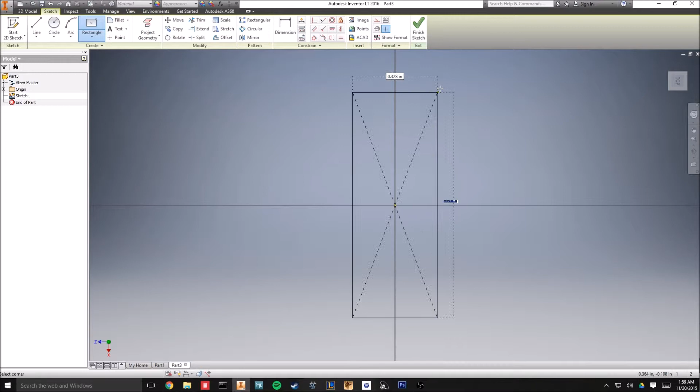Open up a new part file. Now, these are not any real dimensions in regards to soft jaws. These are just going to be a sample drawing of what you might be able to utilize.

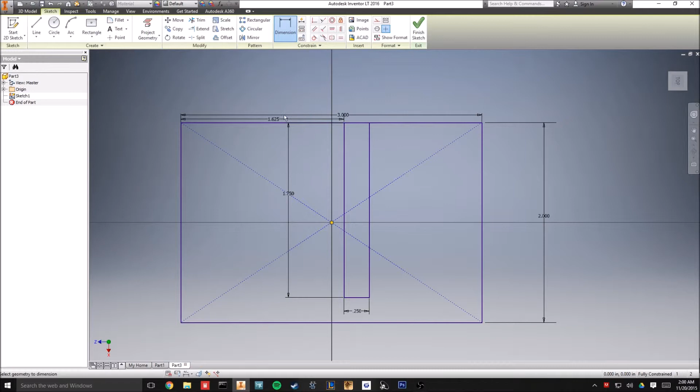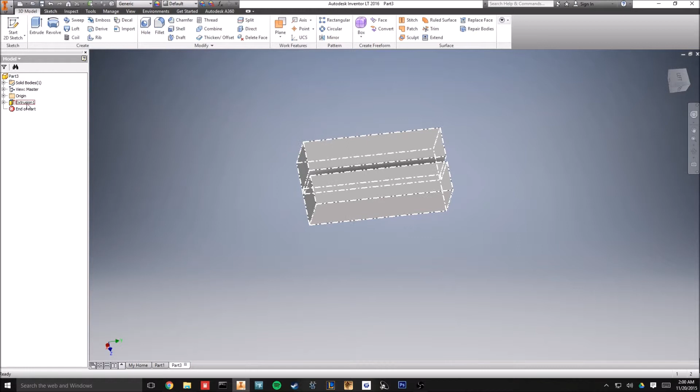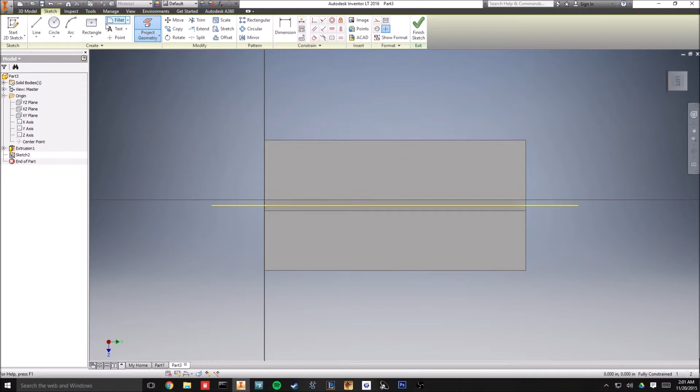Alright, now we have a set of soft jaws that are perfectly centered. Hold up here. Let me edit that feature. Usually have that as a preset. But these are now perfectly centered on the XYZ center point. So we'll create a sketch, and I'm going to utilize some geometry projections to get myself the point that I would like to be.

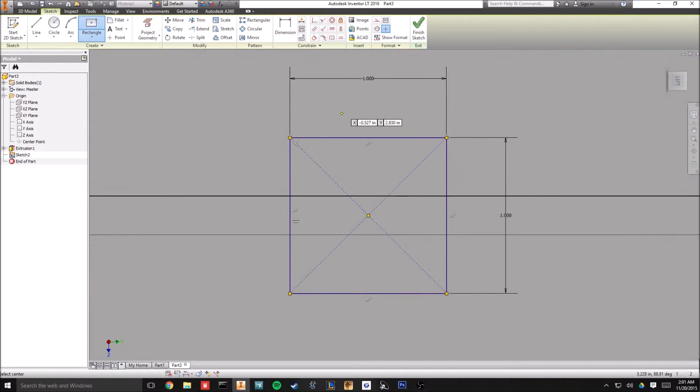Well, it's not finding my center point here, so let me go ahead and remove that, and we'll go ahead and project the center point instead. 1 by 1. So we're machining a 1 by 1 part here, and we'll go ahead and extrude this into the part.

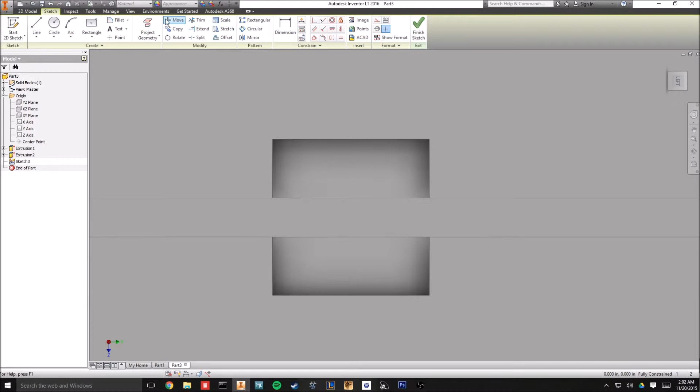So now, in this situation where we'd want to deal with the Mickey Mouse ears, the way that I'm going to do this is already going to avoid the issues with mirroring the feature. I prefer to create them as a single sketch and extrude all of those pieces of the feature inside of that sketch. Some people prefer to mirror it across the line. That's just fine. But as I go in here, my solution to accurately creating Mickey Mouse ears consistently is to

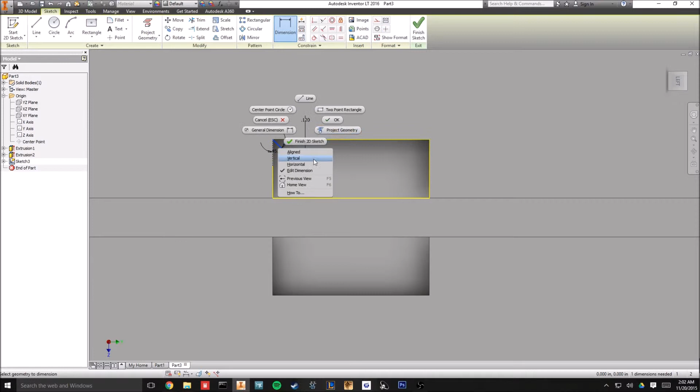create a line, and it comes off the corner. I'm going to hit tab here directly and create a 45-degree line. Now, whatever length I make this, I'm going to want it to be 1/2 of my cutter length, and if it's a 1/8 cutter, then giving it some slop there. And I can now create some Mickey Mouse ears that are a little bit larger, but it's perfectly centered. I don't have to worry about arranging any lines over here or over here.

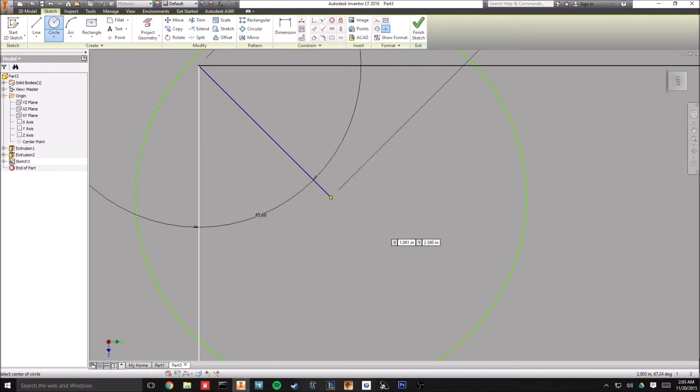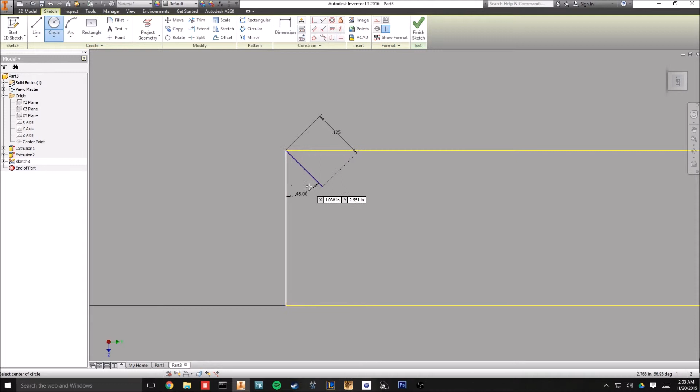Say you don't have the pop-up to immediately create that 45-degree angle. A simple way to do it inside of Inventor would be to draw your line, and then into the dimension, add the 45 degrees here. And now we're free again to create whatever cutter size we want. And every single time you're going to have Mickey Mouse ears placed exactly where you want them.

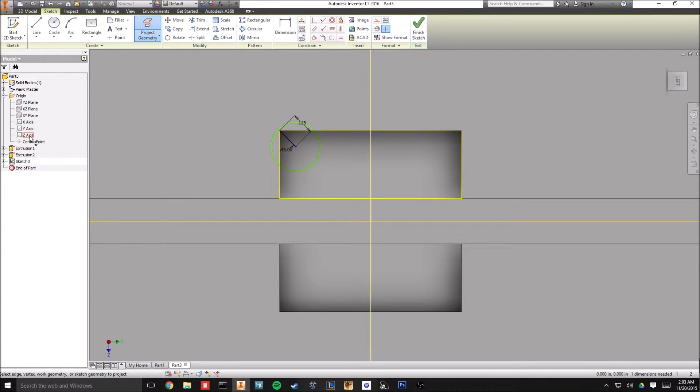Now the way that I'm going to go about creating these Mickey Mouse ears is I'm actually going to utilize the X, Y, and Z axes. And the reason I'm going to do that is because I create all of my parts on center with X, Y, Z axes. I'm able to use them as mirror lines for symmetrical objects. That I find to be a simpler, more neat way to be doing this work.

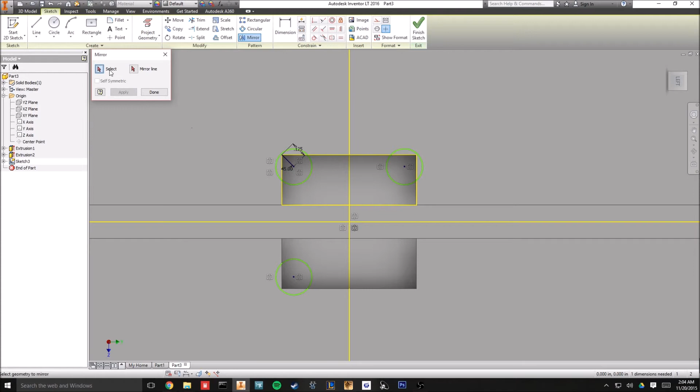So I'll go ahead and before extruding this part, I could either do this afterwards, but in this case, because we're dealing with a square symmetrical part, I'm going to be doing it all inside of the one sketch, so I only have one extrusion to worry about. So I'll now go ahead and mirror the object, apply, apply, apply, and I'll finish this sketch. I'll extrude these. And we have the completed Mickey Mouse ears.

And this is the part that we viewed earlier. So that's the way that I would go about drafting this.

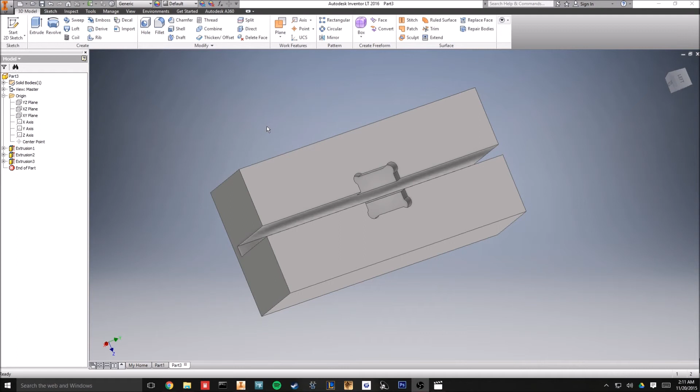One quick note that I realized I had forgotten to add to this was that if you wanted this to be two separate bodies now, I'd recommend doing it at the end. This would be reworking your workflow a little bit, but go ahead, create the sketch now. I'll project this geometry, finish the sketch, extrude it negatively all the way through the part, and we now have two separate bodies, but they are completed.

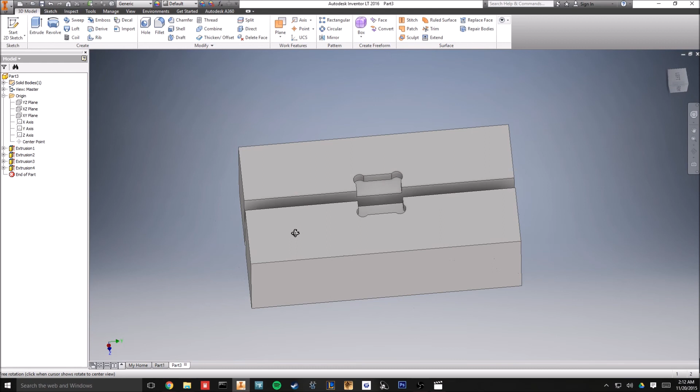Now I understand you might be consistently opening one part file that has these soft jaws already created for your machine. That's the most efficient way of doing it. What I recommend doing is remodeling those jaws with the bodies connected at the bottom here. So create that base model initially with the connection and go ahead and do that final extrude feature. It may be annoying to have to do that each time, however you're going to realize that not having to deal with multiple bodies every single time, particularly when it's a repetitive job like soft jaws, will make your life a little bit easier. So thank you very much for watching.